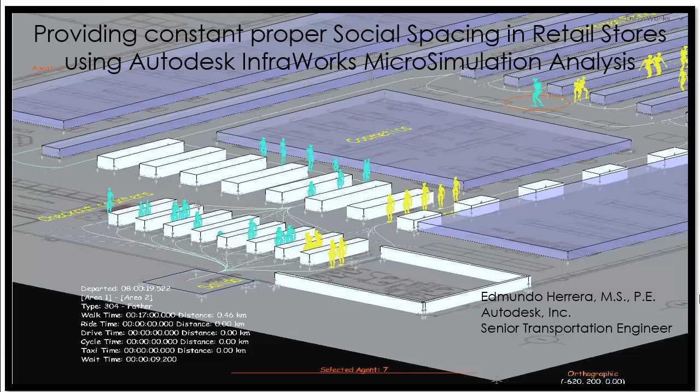I'll be presenting how Autodesk InfraWorks can help retail customers provide and properly control social spacing using microsimulation analysis.

Typically, the minimum social spacing distance required is 6 feet. Every owner must provide the proper infrastructure to account for this recommendation. At times, we encourage social spacing and even cancel events. However, we know that key facilities must always remain open, such as supermarkets, hospitals, and some airports.

Social spacing is hardly honored in these facilities. Few supermarkets practice social spacing either at checkout counters or prior to entering a facility. Even so, there are no correct logistics to compute the number of people and their spacing. Either way, there's really no social spacing control once customers are inside facilities.

We either do or do not. We cannot be oblivious to these guidelines at supermarkets. We must provide social spacing at all times.

There are many benefits provided by microsimulation. The most important ones are: it computes the correct number of checkout counters to avoid collapse. It balances the correct number of people to form groups with the time they must be spaced to avoid collapse in the network. Let's never forget that it is always preferred a constant, steady number of groups of people rather

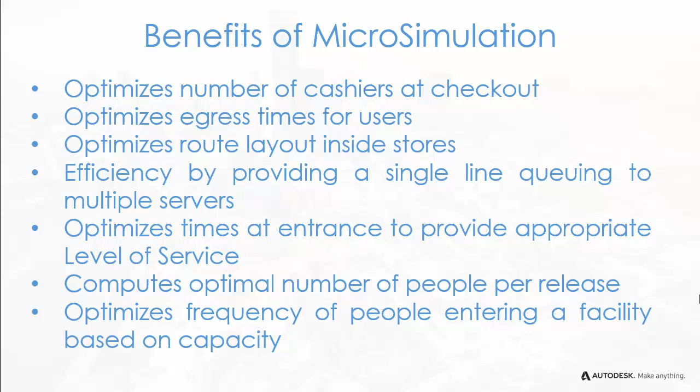than a tsunami of people at once. It provides immediate visual feedback of every simulation run. And since essential goods may be limited to one item per household, retailers can schedule restocking based on egress reports. But the most important benefit is that it always provides safety amongst users by providing social spacing.

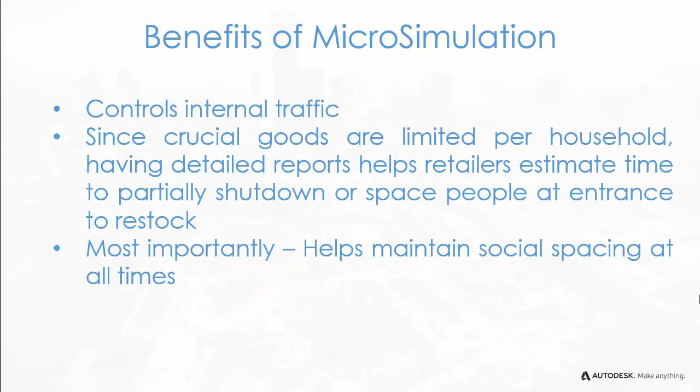Everything becomes more critical when social spacing is mandatory or when an economy partially reopens. So how do we do microsimulations? The first thing you need is a raster image.

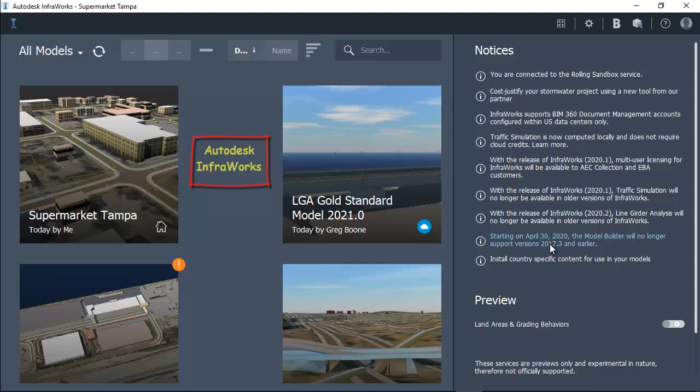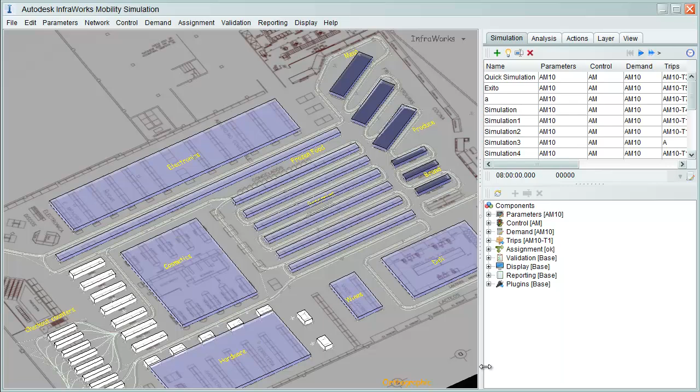This image can be created either from an electronic drawing file with a supermarket layout or from a simple picture taken from a physical drawing. I then open an existing model using Autodesk InfraWorks, define an area of interest, and select Mobility Simulation. Once I'm in Mobility Simulation, I can import the raster image that now serves as the base for my project.

I will be now zooming in, and by measuring key parts of the layout, I understand that space is restricted. Since I have to respect social distancing, flow will then be shifted to one-way traffic throughout the supermarket. Likewise, users will be guided by either gridded guidelines on the floor and or belt barriers.

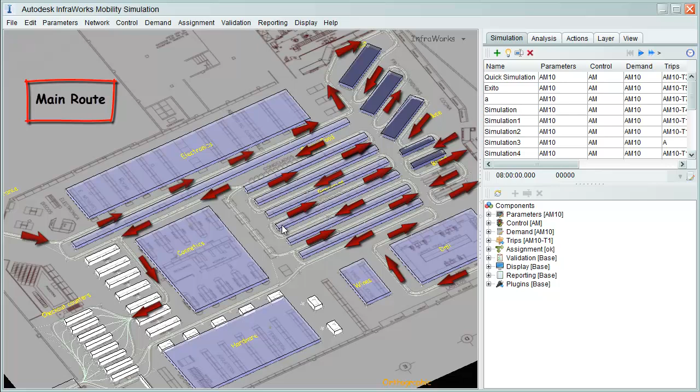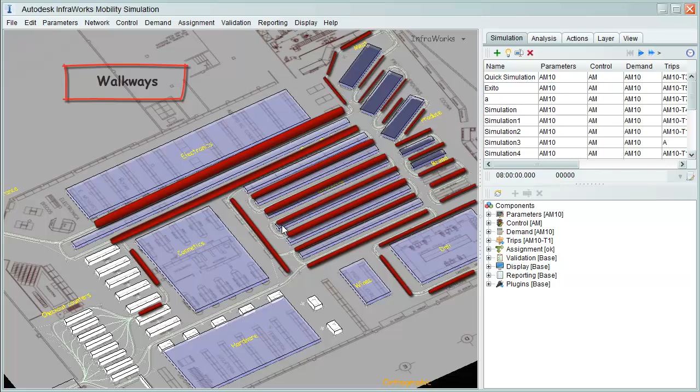I then place walkways along my desired path, touching crucial stands and food racks, slowing them down to strolling speeds as they navigate throughout the facility. After the layout has been completed with walkways, I define behaviors of people, including their dynamics, social spacing, number of people forming clusters, and their release times.

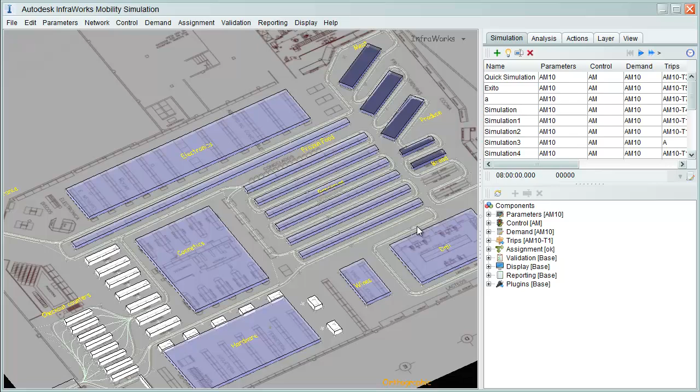Although movement is restricted to one-way traffic only due to spacing, users are given 2 chances to reincorporate to main traffic before leaving the premises. Notice that there is also a fast route provided for a small percentage of users that do not need to travel the complete set of walkways served by checkout counters.

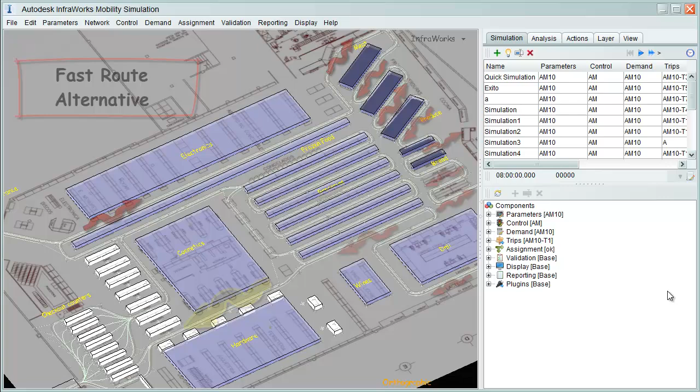Simulation is run. Notice that individual clusters of people have a unique color to understand their behavior throughout the simulation. Simulations can be visualized at true speed or fast-forwarded.

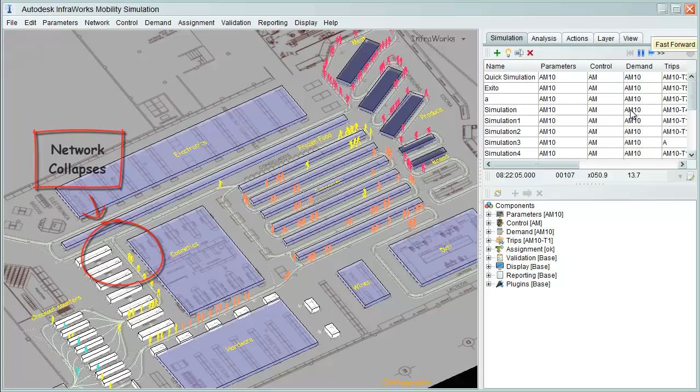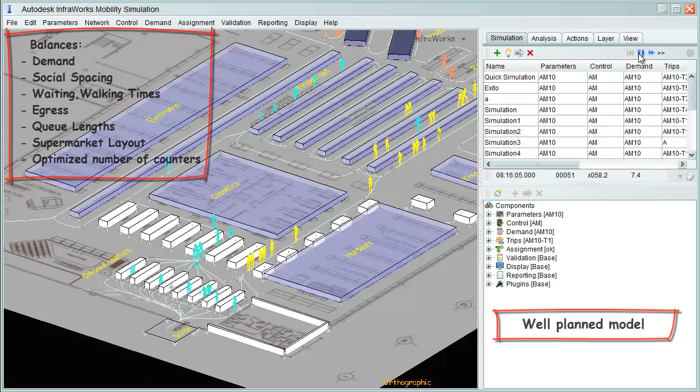If proper planning is not carried out, networks can easily collapse. I then open a new model with the same layout, but with new optimized clusters of people spaced at correct intervals to balance demand, social spacing, waiting, walk-in and egress times, supermarket layout geometry, queue lengths, and optimized number of checkout counters, all at once.

Likewise, users can create dynamic reports to review behaviors, waiting times, walk-in times, and plan accordingly to always provide an optimum level of service.